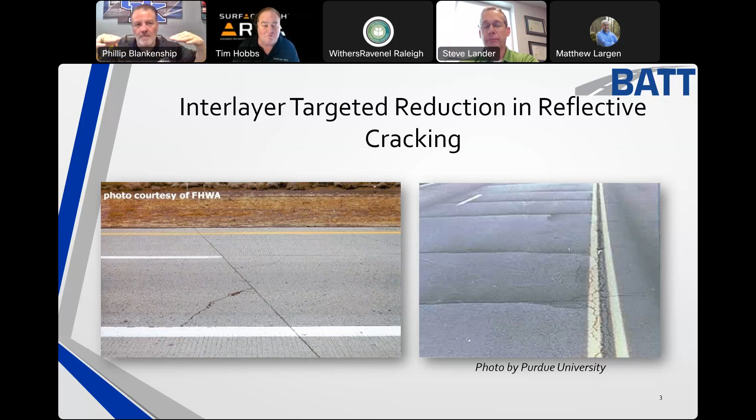That's what we're trying to target. What happens is we can handle a little bit of the back and forth movement, but when the dowels begin to wear out and that joint begins to move up and down, that's the trick. That's the part where a lot of these materials are just not made to attack. We have a lot of materials that try to address this, but we're not addressing the up and down movement. You cannot do that with a thin material. The thin material is good, whatever it may be - grids, chip seals, SAMIs that you put down - but you're going to have something else that's going to address this.

In the early 1990s, asphalt interlayers were used with varying levels of success in France. They call them sand anti-fissures, or SAF. Companies like Screg and others in Europe were using these. When Koch Industries, at that time Koch Materials Company, which sold off all their plants in the early 2000s after 9/11, saw this technology, they said this is something we need to implement in the U.S. So I spent about 10 years of my life working on this.

And what we came up with was finding that if we use a high asphalt mix like they had in France - a small mix, a number 4 mix - and place it about 1 inch thick, it's going to be impermeable, and it's sure a different approach. It looks very different in that instead of it being an aggregate that we fill with asphalt, it's an asphalt layer, a liquid asphalt layer that we fill with the aggregate.

If you've never seen what pure asphalt looks like, this is it right here. I can push in on it and make it move around, and you can see my thumb imprint in it, then it will eventually pop back out. So what they did in France was figure out that we could do this with this type of material that I could really push into, and I could use a lot of polymers in it. By using a lot of polymer, I could get a rebound, and it really worked well.

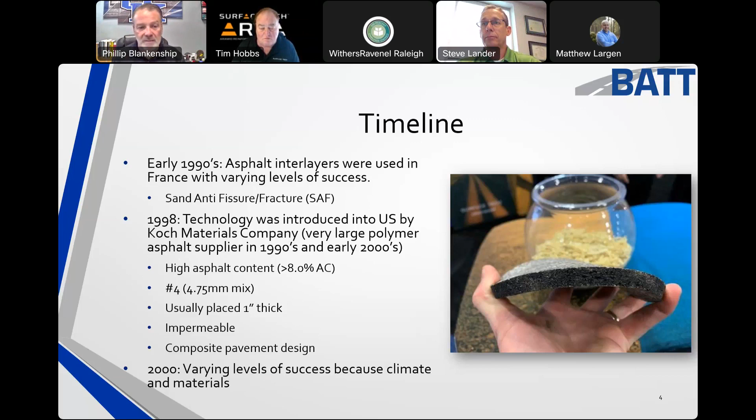What we realized is that we need to climate adjust this material. So by 2000, I dove back in the laboratory after a couple of years of just trying to adopt what they did in France, and we began to do that. We looked at site reviews, thicknesses based upon traffic. We created a performance-based spec using a beam fatigue device that's actually bending the layer back and forth. We created a rutting component.

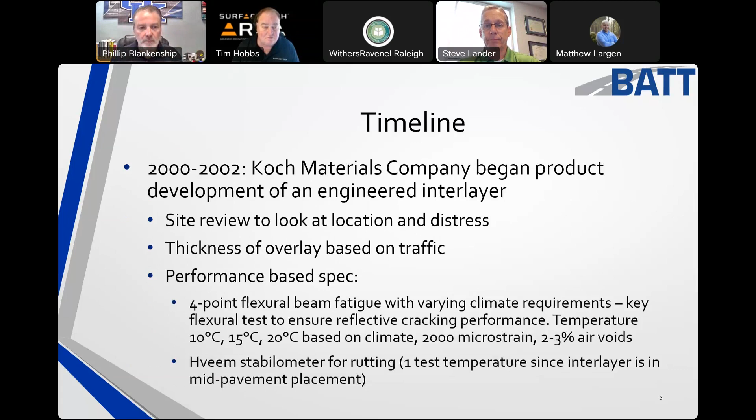2002 through 2006, we then worked with University of Illinois. At that time, Bill Buttlar was there, and a guy named Eshan Dave was also there. He's moved on now up in New Hampshire, and Buttlar is down in Missouri. At the time, we assembled a team under the National Academy of Science. They called it a National Science Foundation GOALI grant, with academic and liaison in the industry. With that, we were able to create even newer tools to help identify how to design these pavements. They modeled it, put down large scale tests, and confirmed what we already knew, putting strain gauges in the pavement to find it.

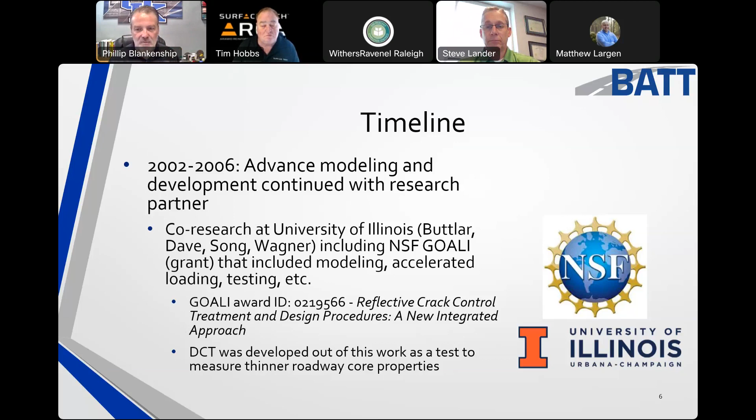25 years later, as with any good technology, it was different. And when the company went away, when the champion went away, why adopt it? Let's go back to what we were doing: 2-inch mill and inlay, we'll go back and just replace it every few years. Some states were replacing it, I think on the Pennsylvania Turnpike, about every 5 years. A lot of these states were saying, could we do something? Can we actually extend our pavement life? We didn't have a lot of data back then, and so adoption slowed down due to lack of understanding. The asphalt supply, this liquid I was showing you, went away except in a very small region out in the middle of the US.

Today, the interlayers are still intact. The one I put down in 2007, just north of me in Lexington, had an overlay put on it. It was milled down to the overlay in 2017, and they put another overlay on top of it. Today it's still performing, and you would never know there's concrete underneath it. Why is that? Because it's offsetting the crack that comes up through, and the crack that eventually does come up is very minor, and you've got a water barrier keeping the base protected.

Today, the problem is, what do I do if I can't get this liquid anymore? Well, we found out that by using a light polymer, let's say a 6428, a 7028, in the hot areas, a 7622, I can use Aramid fiber instead. Aramid fiber is also a polymer, just in a different form. Aramid fiber is also known as Kevlar. By using these long fibers, what I'm able to do is bring in a heat resistant fiber.

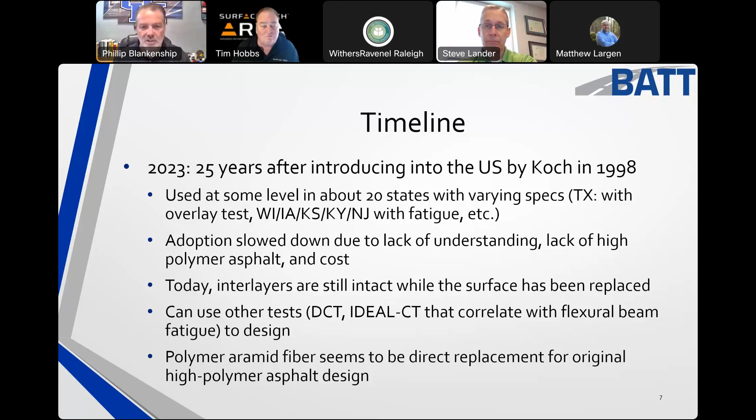One of the things I found was that fiber itself greatly improved the fatigue life. So when I married the fiber to the interlayer, what I got was a product that I could twist, and it reminded me of my old interlayer that I was able to use. So now we're going to reboot this technology. I want to go through and show you some early examples of what we did, and then what we're doing today.

This was a project on I-94 in Racine, Wisconsin. There's actually a TRR paper associated with it, so that's why I'm mentioning it here.

In this case, they used a 1-inch interlayer. They did a V-mill on the longitudinal joints, which worked really well to help control the joints and get rid of the old material. Then we put the interlayer on top, which is very fine so it fills those joints.

What was required on top was actually 3.5 inches for this traffic level, but they planned 4 inches of Superpave mix, put down in two 2-inch layers, which helped with rideability. On the other side, they left a control section with just 5 inches, done as a 3-inch layer and a 2-inch layer.

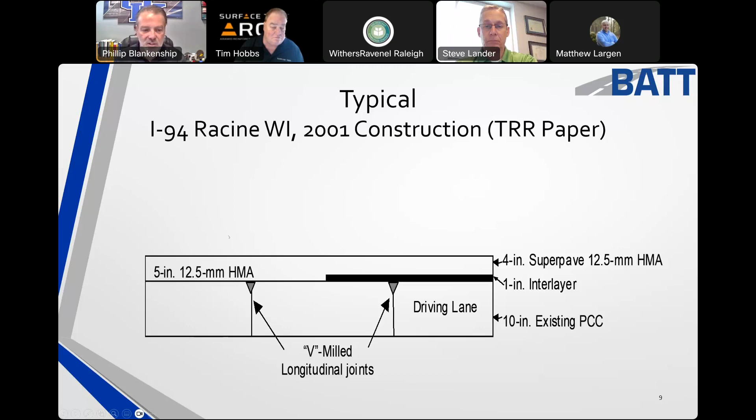This was after about 3 years, and it was looking good. I don't have more data on this project—I wasn't able to get back on it because of the high traffic volume. But like any great research project, it was tracked for 3 years, and then they were done with it. At least they tracked it for 3 years.

Some projects you don't even get that. I'm going to show you some we tracked longer. But on this one, what they saw was that the interlayer section was showing less cracking.

You get some noise in the data, but overall the control sections were coming up with their normal cracking. I normally see cracking after the first year come back at about 25% reflective cracking per year. Some people say it delays the cracks about 1 inch per year.

What really happens is it's not that you're delaying them coming up evenly—some cracks come through faster than others. Really what's going on is you're delaying at about 25% a year, which works out to about 1 inch per year if you're dealing with about 4 inches. If the pavement is thinner, you'll still see about 25% of those cracks come through a year; it just depends on how many cracks you're dealing with.

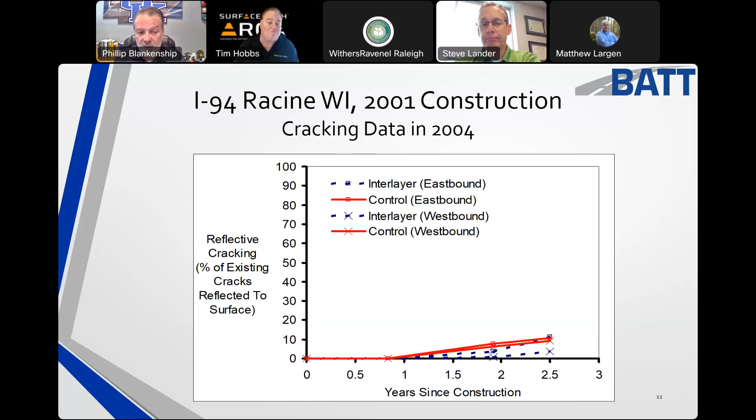When we went to get cores out of this pavement, I knew what we were getting into, so I'll show you what happens. We took a core from the control section—hard to see, but there's a crack going all the way down through here. It's very small at the bottom and opens up at the top. By the way, it was right over a joint, directly over a PCC joint.

When I went to get the core here, you did get a crack, and eventually all cracks will come through. But look at the severity of this crack compared to the other one—this was very typical, and you're really not seeing more than a hairline through here. The interlayer is intact. Also, the joint is about 1 to 2 feet ahead or behind where you took the core, because the crack hits the interlayer and gets diverted through it.

That interlayer—imagine if you painted a rubber band and then stretched it. The rubber band is still intact, but you get these little micro cracks across the top. That's what happened here.

But again, we get this movement that's going to happen up and down, and it's sheared, but it's way over to one side. That's why it's important to also treat the overlay if you can. We got rid of 80% of the movement that was estimated. We just need to be able to handle the rest of the 20%.

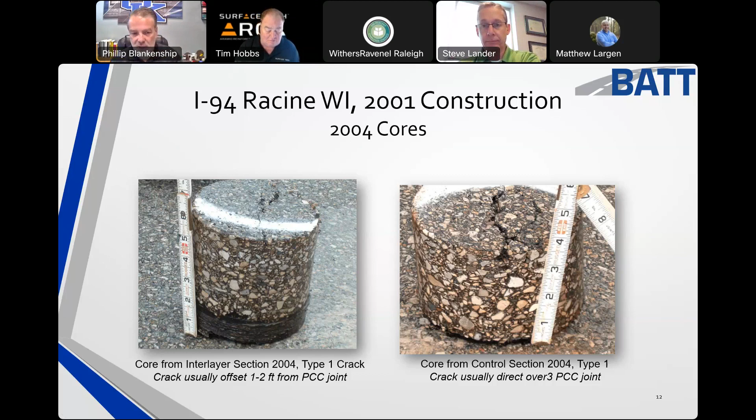So Coke was that old company, and it's not, while I like this, it is not this Coke. It is the Coke that is KOCH.

And what they did was we put a section down in Iowa. Why Iowa? Decorah, Iowa is absolutely in the middle of nowhere. But what we did was it's in the northeast corner of Iowa, and it's a Minnesota type of climate. And it gets very cold, minus 34, minus 40 weather. And so we put the interlayer down.

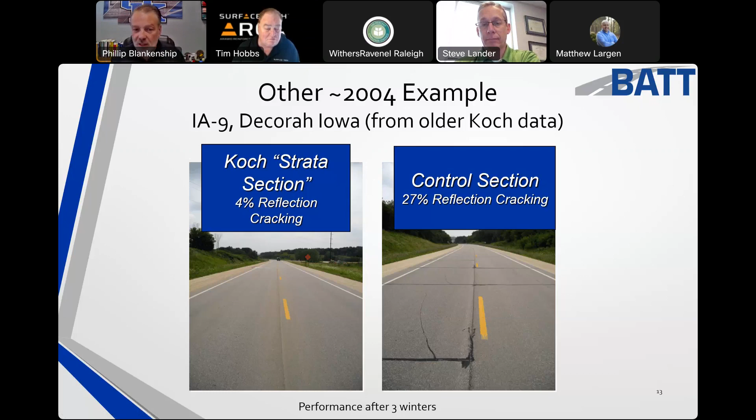Can you see a difference? This is not a side by side. This is an end to end. Same traffic, same climate, same base, and you get that much cracking delay. What I was impressed with was that the one on the right had treatable cracks. The one on the left, I'm sure there was a crack or so in there, but you really couldn't see them, and there was nothing to treat. That's my textbook example.

Today, what we're doing is we're using that same interlayer, but we're using the Aramid fiber. And the reason I know this works is we're using performance-based specifications, and I'll show you how we're doing that here in just a moment. We're using more performance-based methods to design this interlayer today.

I always said that this interlayer, if you could figure out a material to put in it, whether it's bubble gum or whatever you want to do to put it together, or some other polymer system, as long as it will pass the performance-based specs, it will work. It just happens that asphalt is usually the least expensive material that we have, because asphalt is simply the waste that comes from a refinery, and then we get it and we have to rework it.

Palmer Engineering was the designer, and Hayden Materials was the contractor on this job in Taylor County in 2019.

And they said the problem is we had a treatment that only lasted about 6 years for a runway, and they don't have that much money to go repave runways every 6 years. This should have lasted 20, 25 years. So what do? And they said, we want to stop the water.

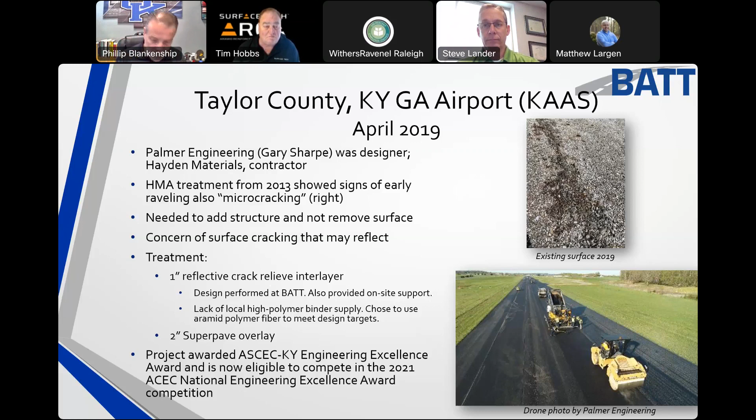I want to show you just a few pictures from that to let you see what it looks like and how it actually was constructed.

When we look at the mixture, you see this is a very fine mixture that goes down. You can see the fibers—those little things dangling down in the pictures. The fibers are so small, about 10 microns, while your hair is probably 50 to 80 microns. These are 10 microns, and that's what's holding this together. But those fibers are stronger than steel.

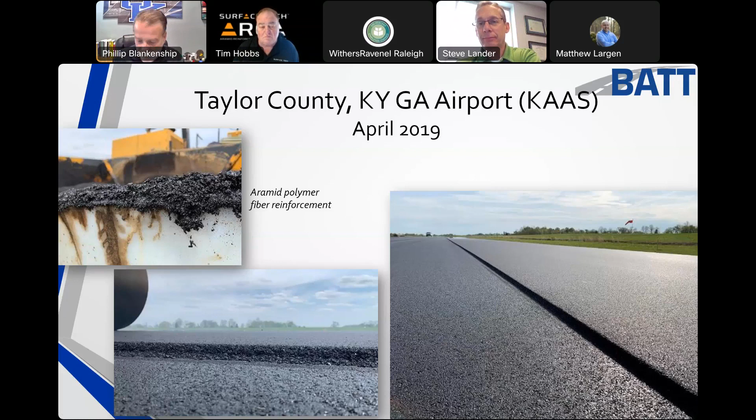This is the 1 inch of material. Naturally, when you think about an asphalt layer that is 8.5% asphalt made of fine material, you're going to say, oh my goodness, what's going to happen when I put a roller on top of it? The answer is, it looks really good and it just compacts. Let me let you see that. Instead of compacting a lot under the roller, you get a lot of the compaction behind the paver.

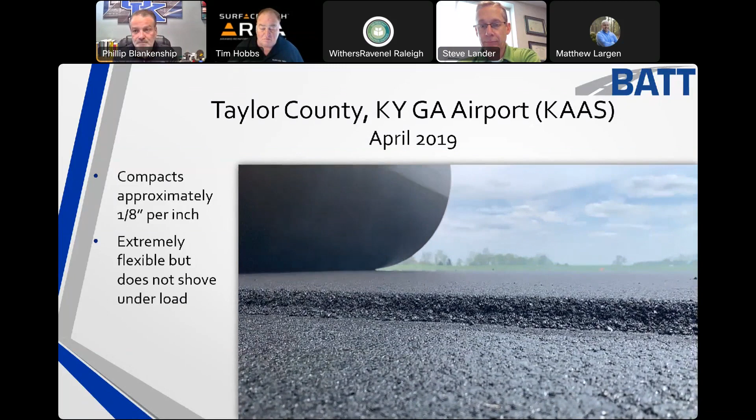It will then compact about an 1/8 inch per inch, or in the metric system, probably about 3 to 4 millimeters per 25 millimeters. You can see it going under the roller there—it is not even moving underneath the roller. This is a mix that has 8.5, maybe 8.6% asphalt in it. We're looking for about 96 to 97% density in place.

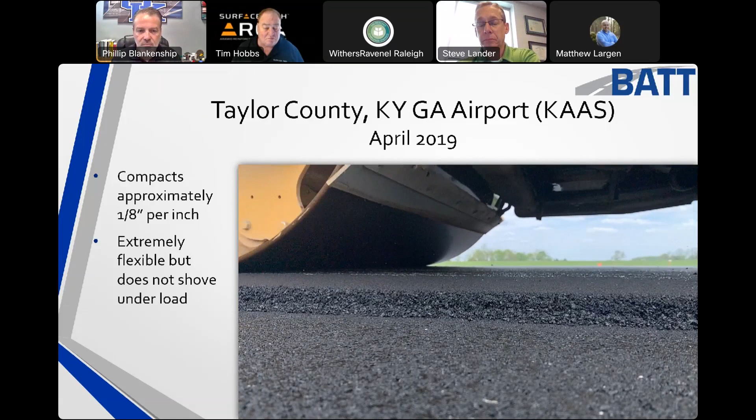On average, at the time that I left Koch from Wichita at the end of my tenure, we had reported—and we were following a lot of projects—an average of 71% improvement in reflective cracking on interlayer projects as compared to a control. That data represents 18 projects up to 4 years old. Somebody said, why didn't you track them longer? Well, I had to earn money for my family and I had to move on. But I do agree, absolutely, they should. It would be great if people would track these projects.

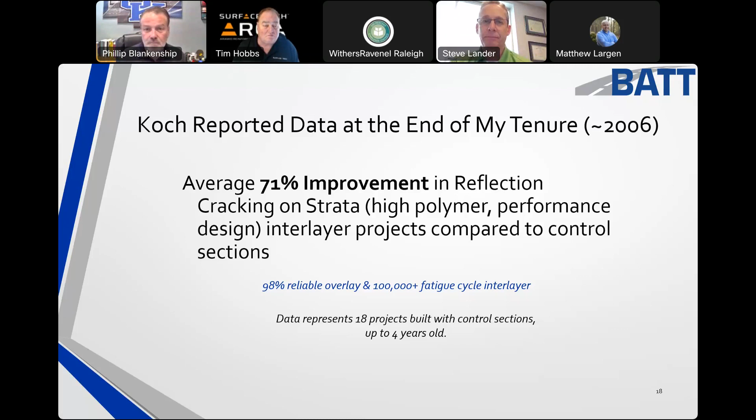Today, I'll tell you this before I move into it. I know that the state of Wisconsin continues to use the interlayer, so does Kansas, and Iowa has stayed true to what they're doing. Why is that? When you look at those areas out in the Midwest, there's a lot of concrete pavement, so they continue to use that interlayer. Texas developed their own version called a crack attenuating mixture that's similar to this, but it has less asphalt and higher air voids. It doesn't do as good, but it does what they feel they need in Texas.

Let me give you a mix design example for those who love to dive into the details. This is one right now—the area just north of us in Canada is going gangbusters with this product because of the crack reduction. We're going to go put several down in Canada this year and next year.

This is an example. Typically I'm using about 3 bins, but in this case they're going to use 4 bins plus their baghouse fines that they'll add back in. And what we end up with is, we're going to use a double dose of Aramid fiber, or 4.2 ounces per ton—that's the pure Aramid. There's also a wax. Let me show that here.

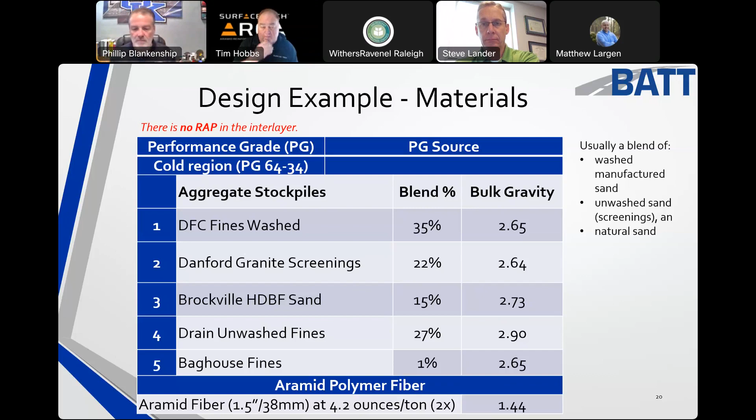The fibers are delivered, and they look like matchsticks. They have a wax coating that goes around them, which adds about another 1.2 ounces per ton. But I'm talking about just the pure Aramid—once it's released and gets into the mixture, that's what we're looking at, about 4.2 ounces per ton.

If you look at a gradation of that mixture, it is fine. The red line represents a max density line. Typically, most mixes we use today are a 3/8 inch, a 1/2 inch, or a 3/4 inch mix—you'll see 1/2 and 3/4 typically on airports. You'll see these mixtures gap and go down underneath this red line. This one is way above it because we're going to reduce permeability, and this is also considered a hydraulic type of mixture. It goes way above this line and is absolutely impermeable.

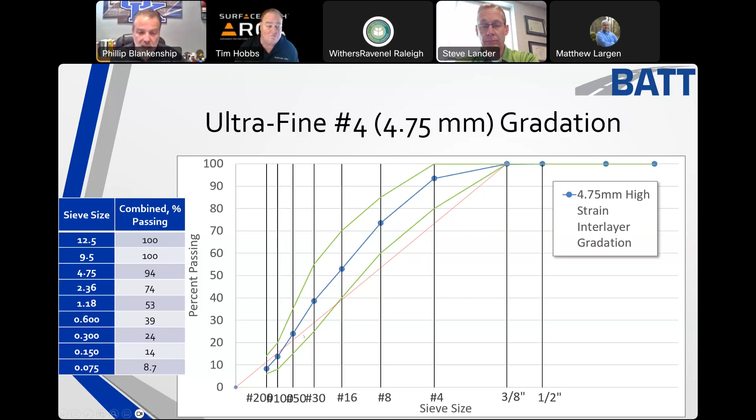When I try to understand why I use the Aramid fiber in there, well, as I mentioned before, it's non-absorbative, it's high strength, it has a high melting temperature, it has really high modulus. So that really fits well for what I need to make this work in reflective cracking.

If I think about wearing a bulletproof vest, the bullet's going to go into the vest and hit this material, and it bends it not very far because it doesn't pull far, and then it rejects the bullet. In this case, it's going to try to crack it, but it's going to resist that crack, and that's how we make this interlayer do what it does.

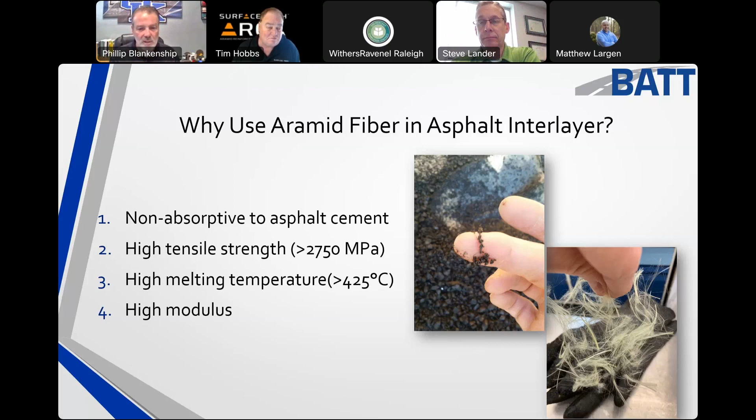You're probably thinking, well, could we also use the Aramid fiber in the surface to help it be crack resistant? Absolutely. To fix the severe cracking problem, you've got to use a combination of materials. Again, one size doesn't fit all. Any amount of fiber will help, but using these material combinations is the answer to really fixing a cracking problem.

The Aramid itself is specified by ASTM 8395. This is what it looks like on a bad hair day, or when you actually split it up and begin separating it and getting ready to put into a mix design.

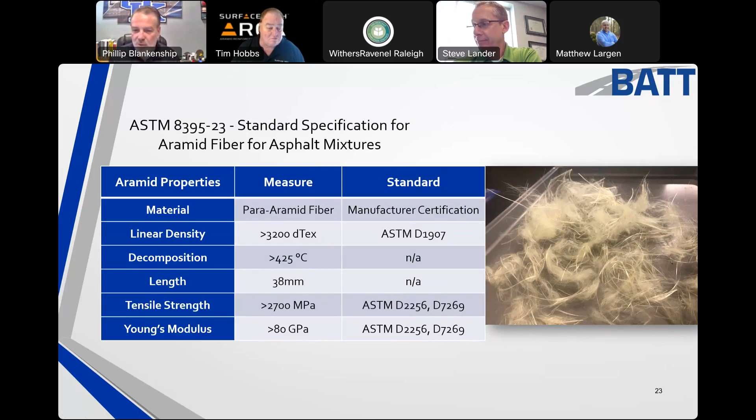That mix design, on the optimum design volumetrics we're looking at here, is about an 8.5% mix, 1.4% air voids. If you look at the other parameters, these are all, if you want to see the GMM, the GSE, the GSB—folks, I do all sorts of trainings on this stuff.

I do Asphalt 101 training. I help folks with commercialization. I get into asphalt innovations—I think I get to do that one next month. But we could dive into all of this type of data. For today, those that like to look at this, this is a 50 gyration mixture.

It has air voids of 1.4%, or if you want to think about it, it's 98.6% dense in the laboratory, over 20% VMA, and I fill those voids—93% is filled with asphalt. So this is an absolutely loaded mixture. You'd normally see this number 65 to 75. We're up at 93.

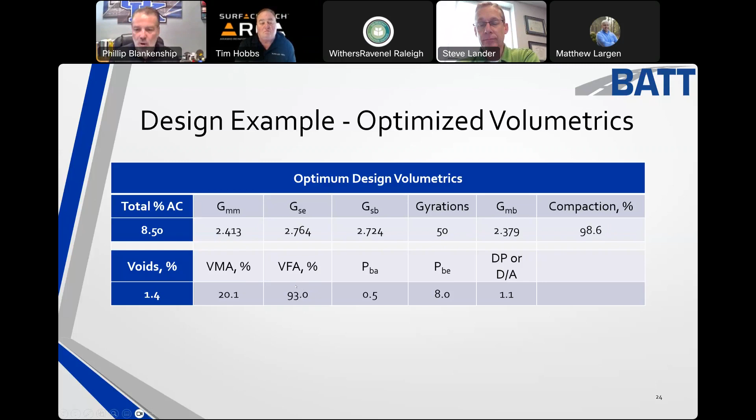When I go to the lab, now I want to run a performance test. So I'm going to take a sample that I make in the laboratory. I'm going to put the sample on end, and I'm going to run what looks like a TSR test on it, but it's actually what we call an ideal CT test. And we're going to squeeze that sample between these two plates, and we're going to measure what's going on.

By doing an indirect tensile strength test on it and post-analyzing what's going on at the back end of the curve, looking at the slope of it, we're able to get a pseudo energy. That's why this test, ideal CT, has become very important in our balanced mix design testing regimen. A good mixture, and I mean a good one, would have a value of 153 at 25C.

That's conventional. If I go down, we just tested one from Arizona. We've tested mixtures from Florida—they're running in the 30 range, and they're happy with that. In Alabama, they may be running in the 50 range on that number. If I'm coming north, you're going to see it start to climb. Texas likes a number of about 80. If I come north where I'm at, Kentucky's wanting to move into the 100 range.

So this is an exceptional mixture at 153. When I tested my interlayer at the same temperature, 25C, using this binder with double fiber, look at the number I got.

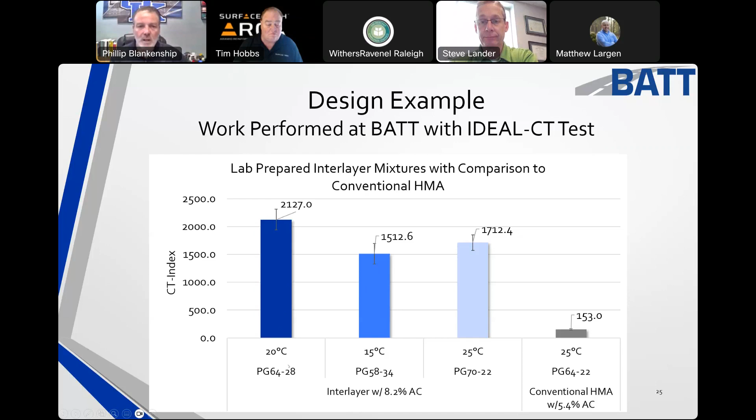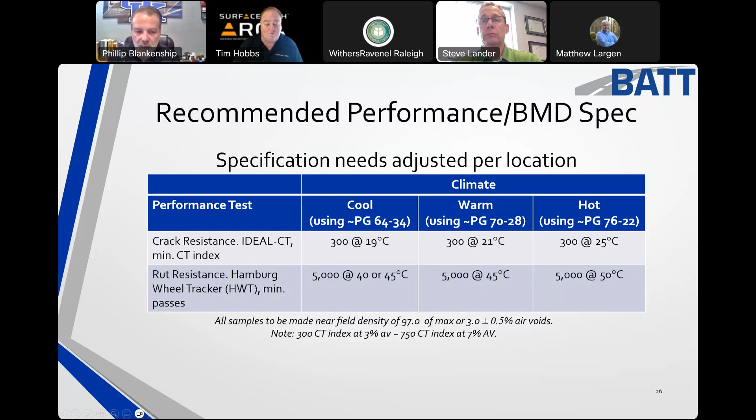So the advantages of this interlayer that we're using, just to recap: we're going to significantly delay cracking. It is impermeable, you are not going to get water through it. Matter of fact, I've done tests on it - vapor will not even pass through. It can be designed to allow that, but it's designed to keep even vapor from moving through it.

We have a generic performance-based spec. If you can make it out of bubble gum, power to you. Updating with newer tests such as DCT, Ideal CT, Hamburg, and things like that. You can mill it, but more importantly, you can leave it in place and let it be a perpetual interlayer, which is what it's designed to do. And they've been left in place across the U.S., using standard hot mix production and construction methods.

Matter of fact, you're getting rid of materials that contractors are dying to get rid of, such as a lot of their fines. So we're using locally available materials with the contractor. I always say contractors love to - so don't take offense if you love the grids and fabrics - but contractors would much rather be placing hot mix than laying carpet. Just saying. It is quick construction time and return to traffic.

I've put down SAMIs and you have to wait - you cannot run traffic on them, or you shouldn't, because you're going to get gravels popping loose. This, you can return very quickly to traffic. And as far as that goes, it's about the same cost or a little less than what a grid would be - I know that's going to come up on cost. Costlier than a SAMI, usually same or less than a grid. And if you look at the traffic delay that you've got with the SAMI, you would much rather have this.

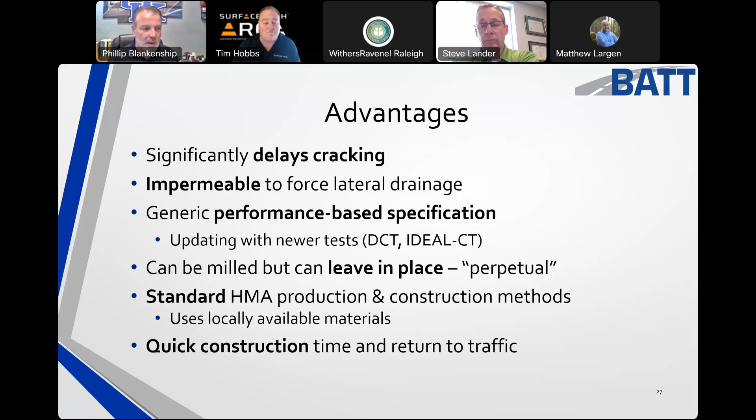Site selection. The RCRI, reflective crack relief interlayer, about doubles the life of a pavement. I'd like to say that, and it could even be a little bit more. It really depends on the severity and what you have going on.

We're going to place it on concrete or asphalt. It works very well, complementary with an overlay that's got advanced crack resistance. The PCC joint transfer, I like to see a 70 load transfer or better, if we could get that. I know that's not always desirable, and you go in to do a repair of a pavement and you run out of money, and you've got what you've got, and you have to move over it. And so the nice thing is the interlayer, again, will improve whatever it goes on top of.

It can be used over crack and seat, but you'll need to level first. The interlayer will knead into large cracks or joints. Keep in mind that joint seals may bubble through, because this is an impermeable layer, just like you may see tack bubble through, but it really does not affect the performance. And personally, I like to leave a little asphalt over the concrete if I'm milling, or use a leveling course. That way I don't have to go directly on the concrete. It also helps to eliminate any water bubbles that may happen in there.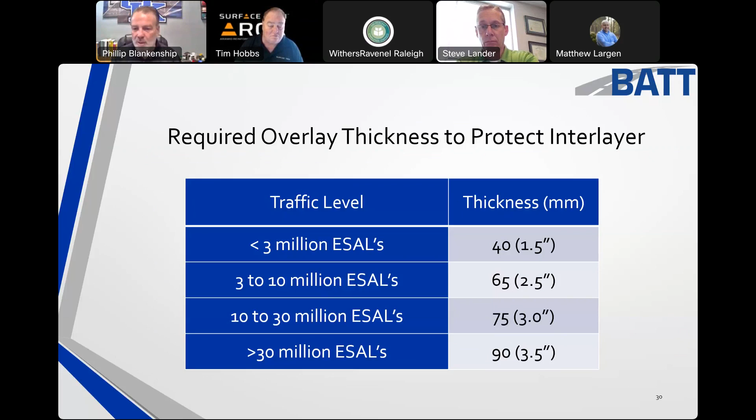Concerning construction recommendations, only steel wheel rollers are going to be used for compaction. We don't want rubber tired on this, and we don't want to put them in vibration mode. You just don't need it. The interlayer will go down very smoothly, and with a static roller, it'll roll right over top of it.

Density of the in-place mixture is a minimum of 96% of maximum gravity. We're going to roll the surface to 1 inch thick. So typically they'll put it down about 1.25 or 1.1 inches, and it will roll to 1 inch.

Then you can release to traffic within about 5 days of placement, and you can open the traffic after it's cooled to less than about 150 degrees, or whatever your normal specs would be. Maybe it's 160, maybe it's 140.

You should cover it. I like to cover it within 5 days of placement. In an emergency situation, you could leave it open, but keep in mind it's impermeable. Water's going to sit on top of it. You've got to have your road signs up, because it would be slick if you had rain on it.

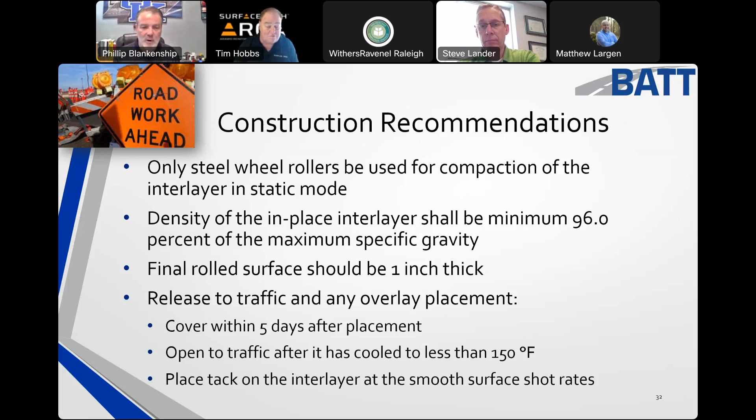Again, it's made to be an interlayer, not a final surface. You would tack underneath the interlayer, and you would tack over top of the interlayer, just like regular paving.

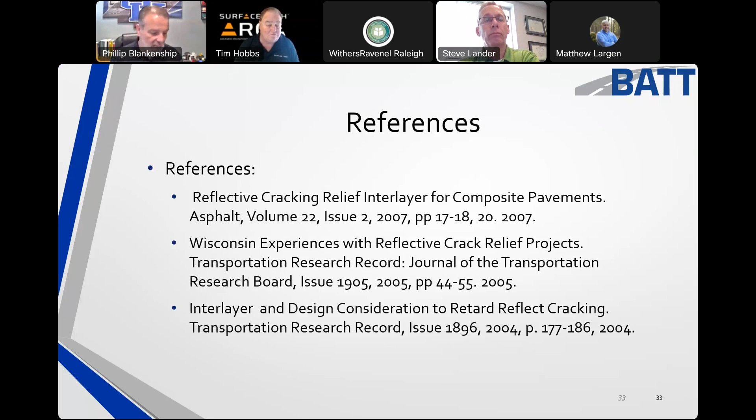A few references if you wanted to look those up. I've got some other papers that we've recently written, done quite a bit that's being published, up in Canada right now. The Transportation Association of Canada and the Canadian Technical Asphalt Association, CTAA.